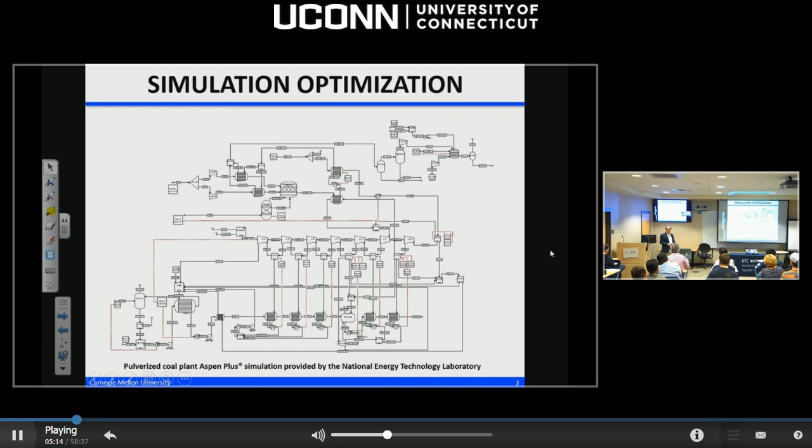I would like to do all that based on, basically, these simulations. And of course, that's the problem that we started looking at. And very quickly, you realize that looking at this problem on top of a simulator is a very difficult problem to address. Why? Because, well, if the system is a black box, I don't quite have algebraic information for functions. It's very difficult to get gradients. I can get them numerically, but it's going to be expensive in some cases.

And if there are local minima, it's going to be very, very hard to actually optimize and find the best solutions. In fact, if there are discrete decisions, these performance curves are going to be shifting all over the place. It's going to be very, very difficult to find global optima. Another issue here is, of course, that the simulations might be costly. In our case, we're using something like Aspen, which might take a few minutes, but if you're looking at optimizing on top of finite element simulations, those simulations might take hours, weeks, even longer.

You don't want to be drawing too much data, okay? So this is not going to be a big data problem in some sense. Even though I can potentially draw as much data as I want from the simulator, I don't want to do it. I want to avoid that if possible because it's expensive in some cases.

And last but not least, simulators are not really robust in the sense that you spend a week trying to get something like Aspen to converge, and then you change one parameter, you change the recycle stream, and you realize this thing is not converging anymore. Why? Because there's so much nonlinearity underneath in the equations that it's very hard to get them to converge.

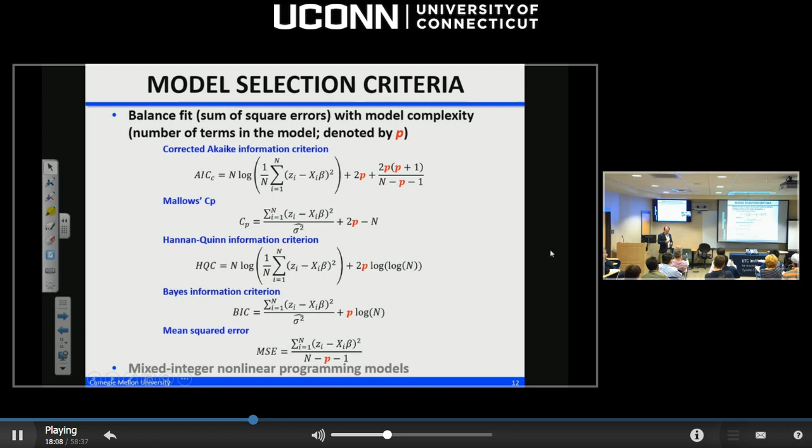So at the end, you end up with a formulation that has a mixture of continuous and binary variables, and you have nonlinearities. So what you have is a mixed integer nonlinear optimization problem, which in general is a difficult model. Okay? Now it so happens that there is technology out there, technology that we've been developing for the last 25 years, something we refer to as branch and reduce, and I'm not going to get into details. All I'm going to say is that there is even software that we've been building for the last 25 years.

These algorithms are deterministic. They are not of the stochastic type. They are of the branch and bound type, and as a result, they do guarantee global optimality even when the continuous relaxations of these problems are non-convex and have multiple local minima.

In terms of software for this type of problem, at this point there are five deterministic branch and bound solvers addressing mixed integer nonlinear programs. BARON appeared about 10, 15 years ago, but more recently we've seen the appearance of SCIP, ANTIGONE, LINDO Global, and Couenne, all of which are addressing the same class of optimization problems, mixed integer nonlinear programs.

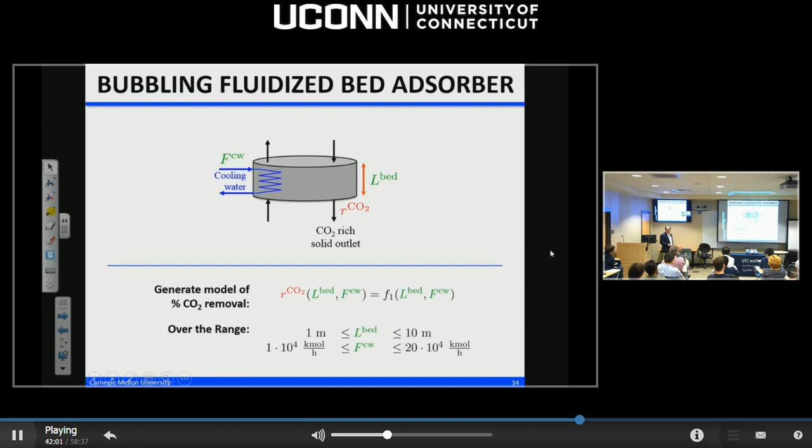My primary objective is the removal of CO2, and basically I'm looking to figure out this function, removal in terms of length and flow rate. I postulated bounds here to make my problem well posed. As you can see, this is a large reactor, and in fact, people are interested in designing such large reactors at this point.

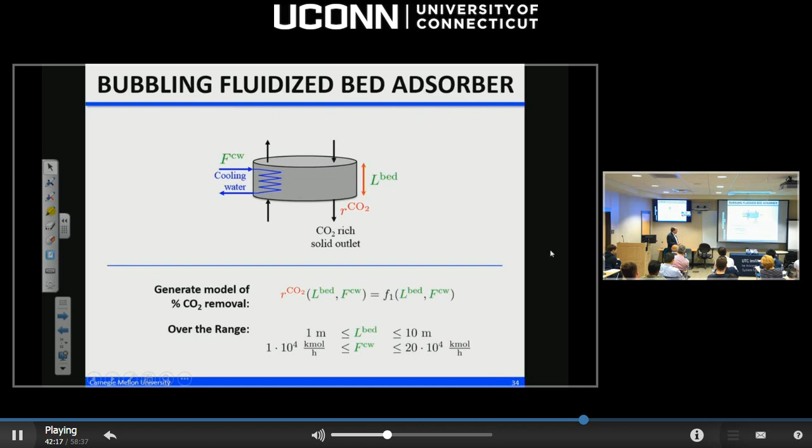So I postulated a bunch of basis functions, and as you can see, the model is very ugly, okay? Because I postulated a large number of functions, some linear, some quadratic, some exponential, some logarithmic, all kinds of little powers here and there, ratios, products, and so forth. And surely in the context of a single model, this is not too bad, but if you start thinking now in terms of a system composed of many pieces of this sort, things would be very complex if we were to use models as complex as this.

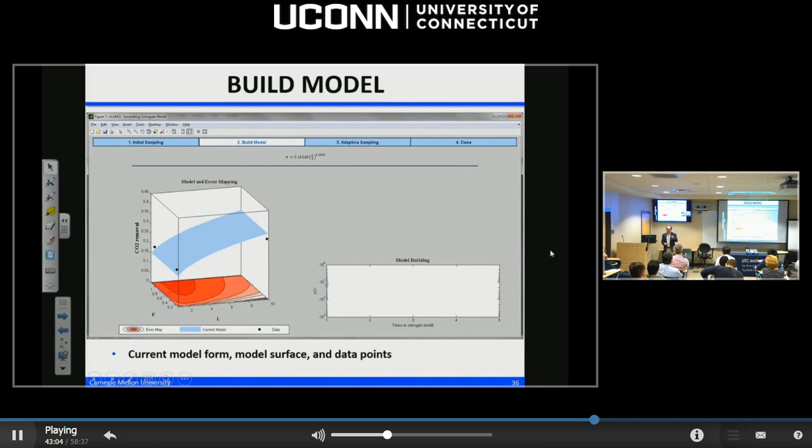So I would like to somehow simplify this model, and what ALAMO is going to do, it will start by taking perhaps a pre-existing data set, these points pre-existing. Well, actually, it takes those as input, and it will fit a model initially based on the initial data set. And then it will do more samples. Initially, of course, it will do those randomly, but then it will start using the adaptive sampling technique more and more, this SNOBFIT tool.

And as it takes more measurements, it will optimize. In this case, you are optimizing the Akaike information criterion. And I'm showing here at this stage with 4 measurements, the optimal AIC is to involve only 2 terms out of all those 60-some terms in the surrogate models. This is optimal because going with 1 term or with 3 terms increases AIC. And so basically you had 2 to the power 66 possible things, is that correct? 2 to the 66, yes.

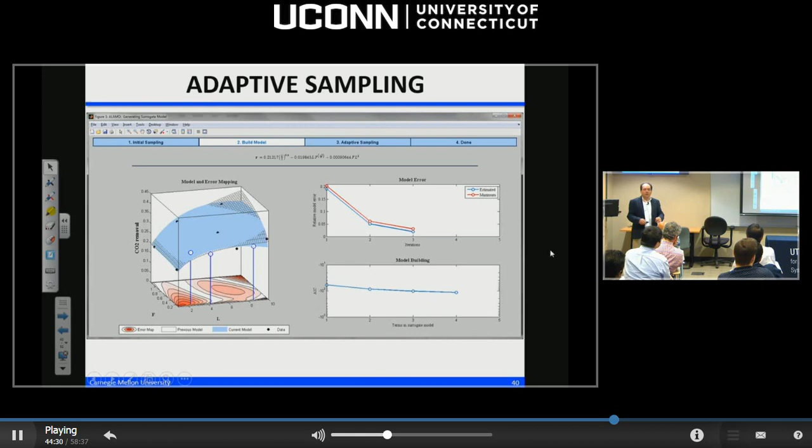Okay. A question, if you don't have simulation data, but you have the equations, complicated equations, can you simplify it? Or you have to go through generating the data? You have to generate the points, yes. We work with data, we don't work with the explicit algebraic representation of the equations. So it will continue to take more points until eventually the sample error estimates are low enough to say my mean error is small enough, I'm going to terminate at this point. In this particular example, it terminated with 3 terms in the model.

All right, so here's now what we can do with the model. Once I have the model, I can do all sorts of interesting things. It's an algebraic model, I can minimize, I can maximize. And of course, if I want to minimize cost of electricity, basically it says don't remove CO2 or remove as little as possible. If I want to maximize CO2 removal, of course, it's going to say you have to pay a lot in terms of electricity, in terms of cooling water. If we could have it both ways, you would be at the point of utopia, but you cannot do this. So what you can do, in fact, you can generate the Pareto optimal curve.

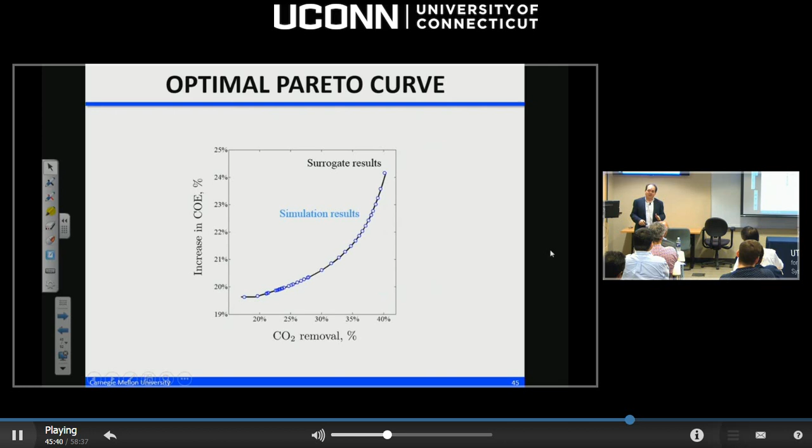I have the model, and therefore I can generate this curve, and then I can decide where I want to sit on this curve, what level would make me comfortable in terms of expenses and CO2 removal. And then just closing the loop here, the dots here are from actual simulation. The black line in this graph is the surrogate model, and the dots are from simulation, meaning my surrogate model is right on the money; it provides a perfect representation of this particular system. For this particular problem, once you get a model, it's actually a continuous model. There's no discrete variables, right?

Once you get a model for this particular problem, it's a continuous variable model. Yes, it's a continuous model. You don't have discrete variables. That is quite correct. Yes.

Okay. Just a quick comparison between this sampling approach and other kinds of things that you might do. I'm comparing against those 45 functions that I talked about earlier. Three modelers, ALAMO, the lasso, and ordinary regression, in which case I utilize the error maximization sampling that I described. So in the context of ALAMO, I can do any of these.

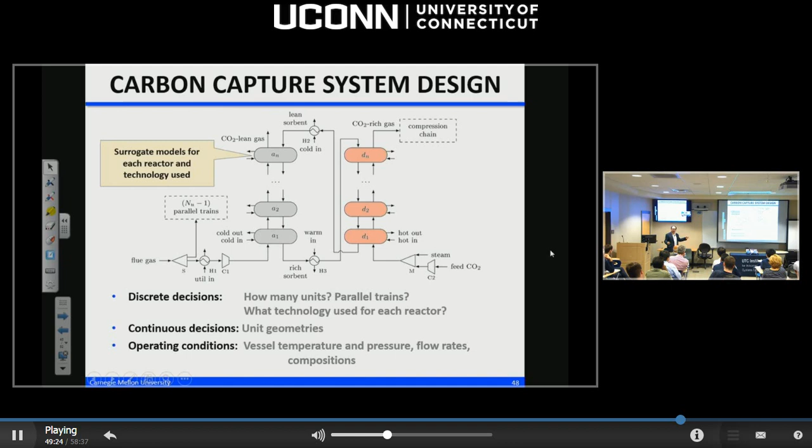Other things I could decide here are optimal flow rates, the geometry of these reactors, sizes. Inside these reactors, remember the cooling water? There's going to be heat exchanger tubes. The question is how many of those tubes to put in there. That will determine the heat removal rate. So we would like to optimize, assuming that we have detailed models for all these units. And the approach is, again, we will build surrogate models for each of these units independently, and then put all those together into a single algebraic formulation to optimize.

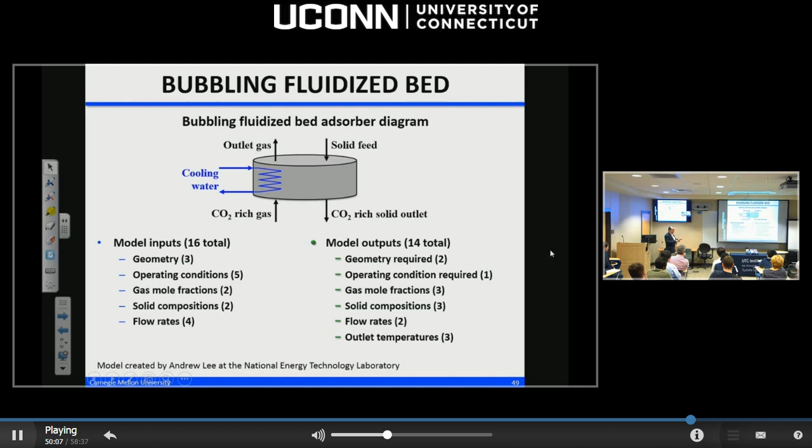So here's the model now for the reactor, and it's going to be more complex than before, because I have about 16 inputs and 14 outputs in this particular system. As you can see, I have quite a bit of detail in terms of mole fractions, geometry, heat exchangers, number of tubes. Even for the objective function, for the cost of building these units, we have included the cost for taking the solid sorbent, lifting it with a lift, and dropping it on top of the reactor. Quite a bit of detail, that there was no way to solve on top of a simulator, but now we will build the surrogate models, and here's an example of the surrogate model for this particular system.

The pressure drop in the context of the reactor, as you can see here, is proportional to the length of the reactor with a few correction terms. That's the simplicity I was talking about earlier. I cannot look at a neural network and say, hey, it makes physical sense. But here, I can look at ALAMO's surrogate model and say, yes, I know pressure drop has got to be proportional to the length of the bed. Had this term not appeared there, I would have known there was something wrong in the data or the implementation.

How do you make sure those physical insights are kept in this model? What we did, we tried to impose many non-negativity constraints for certain quantities we were modeling, like mole fractions and such. We tried to impose constraints on the sum of mole fractions equals to 1. So it was in part through the constraint regression feature of ALAMO.

You don't keep the structure like this or square function of this? Yeah, and also maybe the basis functions also help, right? That could be based on the physical. That can also be done, yes. We didn't do much in terms of trying to limit basis functions in this particular context. But the bottom line is, if you have a simple model, you can look at it and decide whether it makes sense physically or not. If it doesn't, then perhaps you need some more measurements or different basis functions to make progress.

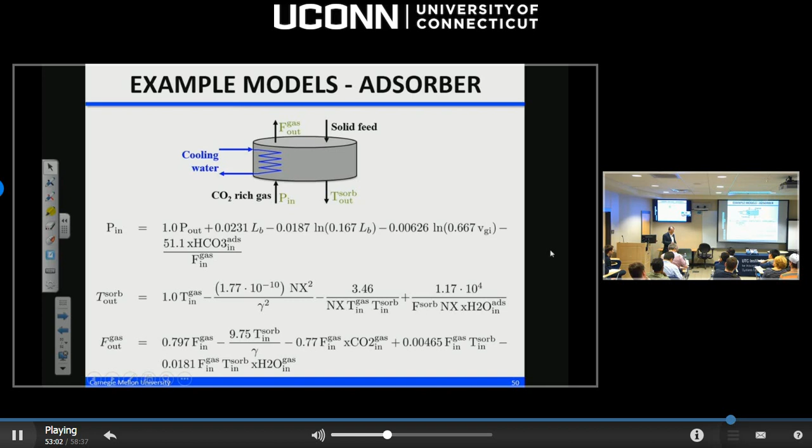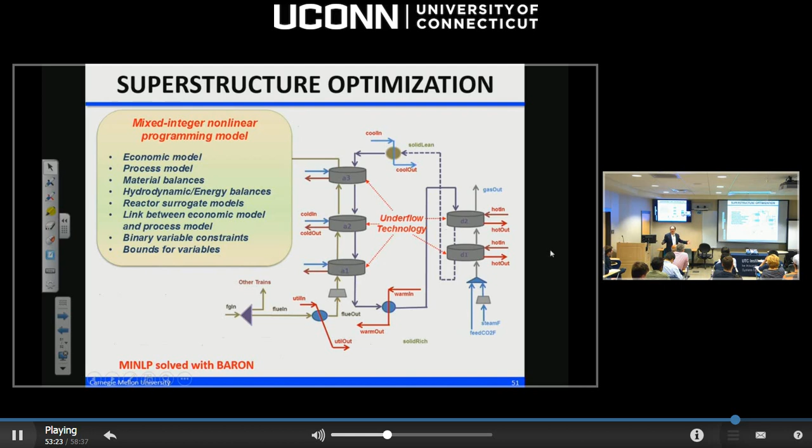Correct. All right, so now once I have the algebraic model, I can go and optimize it. This was a mixed integer nonlinear programming model with about 1,000 constraints and variables, a couple of hundred binary variables, and of course we can solve that with BARON again. And it will come back saying use 3 of these adsorbers in series, 2 on the other side, and it would optimize the geometry and everything in this particular system.

All right, so in conclusion, we have a technology here where the aim is primarily to come up with models that are as simple as possible, and we ask the question of what are the simplest kinds of models we can come up with in modeling from data, and are those worth spending CPU cycles for? We do have constraint regression capability that's unique in terms of what is out there in the literature, in the sense that we can impose constraints on the response surfaces themselves.

At this point, the code is available. I invite you to use it and let us know how it works.